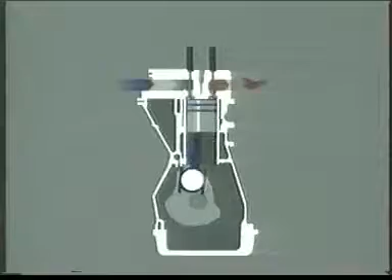Modern turbochargers are based on a simple principle. If the air entering an engine is pressurized and more oxygen forced in, then by adding more fuel, the result is higher engine torque and more power.

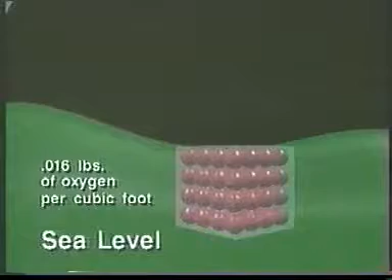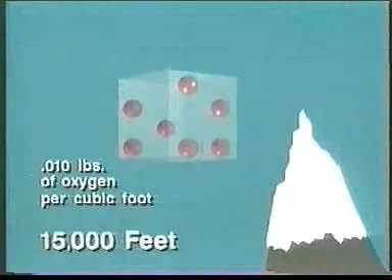At sea level, there are 0.016 pounds of oxygen per cubic foot. At higher altitudes, the air is thinner, so there is less oxygen available. For example, at 5,000 feet, there are 0.013 pounds of oxygen per cubic foot, and at 15,000 feet, only 0.01 pounds per cubic foot. So as altitude increases, it becomes more difficult for an engine to obtain the mass of oxygen it needs to generate its required power.

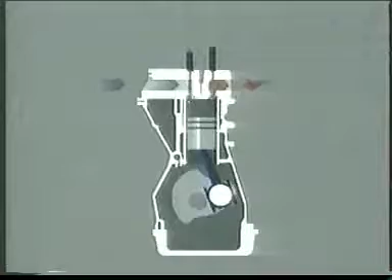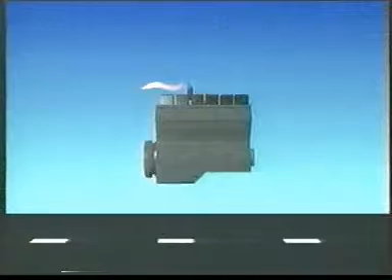In a naturally aspirated engine, the only force pushing air into the engine is the ever-decreasing atmospheric pressure. With less oxygen available for combustion, the fuel is only partially burned, and some escapes out of the exhaust as black smoke. A turbocharger helps supply air by forcing it into the combustion chamber under pressure. It is able to do this since the reduced atmospheric pressure makes the turbine stage more efficient. Thus, the engine can maintain virtually the same air-fuel ratio as at sea level, with almost no change in either power output or exhaust emissions level.

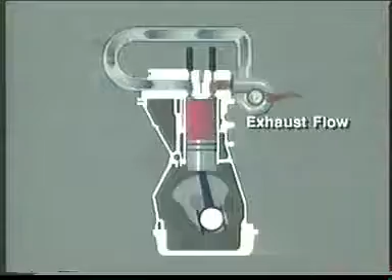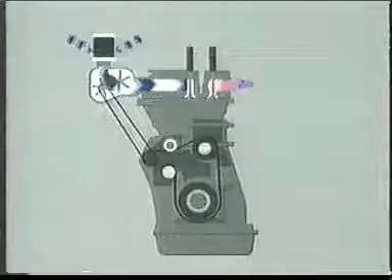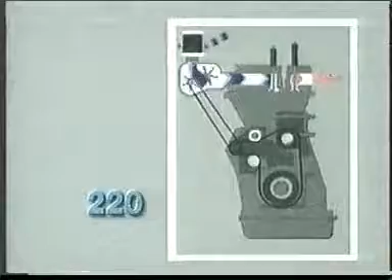Turbocharger technology evolved from mechanically driven superchargers, which create boost pressure using a mechanical pump driven directly from the engine. However, the inefficient supercharger is an engine parasite. It uses a large proportion of the potential power increase to drive itself. For example, a supercharger that could theoretically raise a 220 horsepower engine to 370 horsepower could only manage 320 horsepower. The supercharger itself absorbs 50 horsepower.

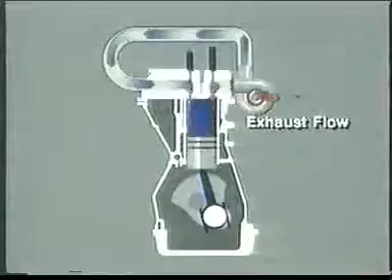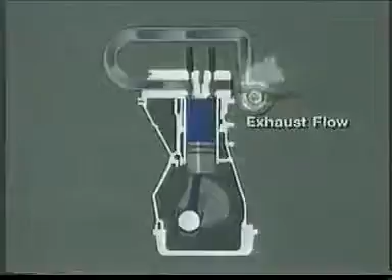Because a turbocharger is able to utilize both the pressure and heat energy of the engine exhaust gases without taking power from the engine, it is far more efficient. It's this benefit that inspired Holset to begin developing turbocharger technology in 1954, and this is also the reason why most diesel-powered trucks have turbochargers today.

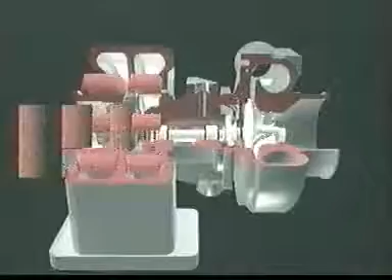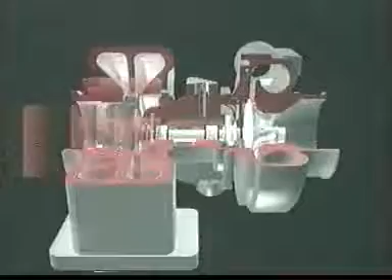Inside a turbocharger, exhaust gas is channeled through the turbine housing, where it increases speed. The gas then flows through the turbine wheel, where it slows down again, releasing energy. The turbine wheel drives the common shaft that connects it to the compressor wheel. The compressor wheel draws filtered air into the compressor housing, raising both its pressure and density, and forces it into the engine.

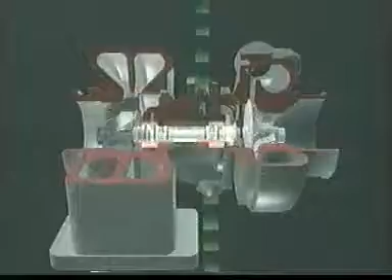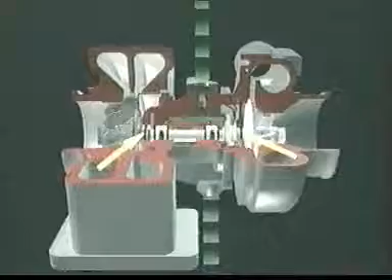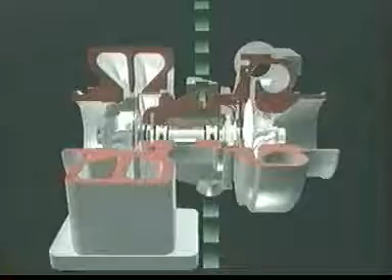The center housing contains precision, fully floating journal bearings. The bearings ride on a film of oil to keep the turbine and compressor wheels turning smoothly at high operating speeds. Also, at both ends of the center housing are oil seal rings, often called split ring seals or piston ring seals. These rings, in conjunction with careful control of the gas pressure differences on either side, help ensure that the oil does not leak into either the compressor or turbine casings. The center housing also contains a thrust bearing, oil slinger, oil baffle, and journal bearing retaining rings.

The rate of airflow into the engine is controlled by the design of both the wheels and housings, and by the speed of the turbo, which automatically responds to changes in engine fueling.

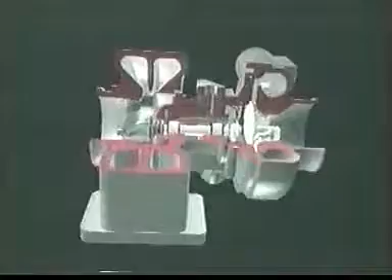It is designed to help you increase your knowledge and skills of turbocharger failure diagnosis. Firstly, let's look at some of the on-vehicle symptoms that are commonly linked to turbochargers, but in many cases can be engine-related. There can be many causes of low power, low boost and black smoke.

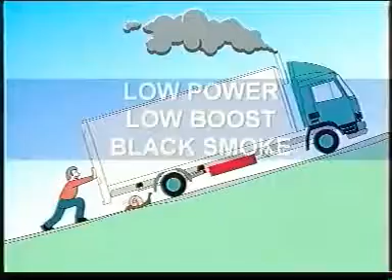The driver won't be happy with any of them, but before taking the major step of removing the turbocharger, there are a number of on-engine checks that could save you time and money.

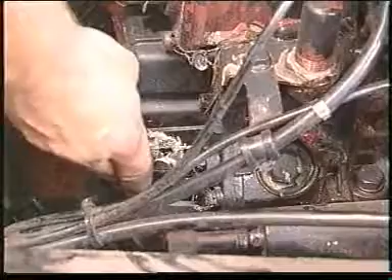Firstly, check the throttle linkage adjustment is correct. Check the injection pump, fuel timing and delivery is correct, and check the injectors. Also check the fuel supply is not restricted. Check the intake or exhaust systems are not restricted, and check that there are no restrictions through the air cooler.

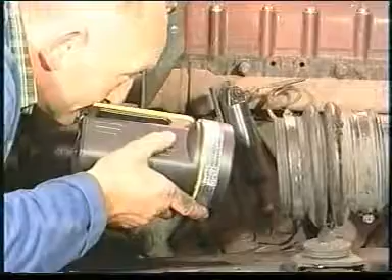If all these are problem-free, then you'll need to check the turbocharger.

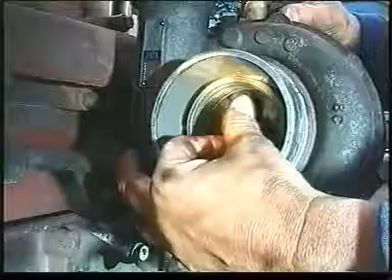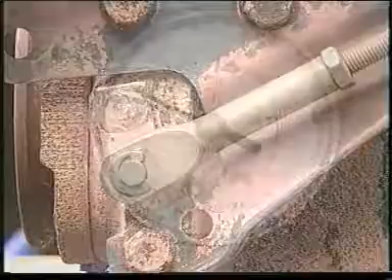Firstly, check that the turbocharger rotor rotates freely. Then check that the axial and radial clearances are to the specifications in the Holset Service Repair Manual. If the turbocharger model has a wastegate, check its operation by applying 3 bar or 45 psi air pressure. If you still have low power, low boost or black smoke, remove the turbocharger for closer inspection.

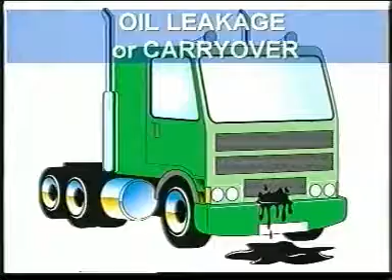If the problem is oil leakage or carryover, again check the turbocharger rotation and clearances. Check for restrictions in the air intake and oil drain.

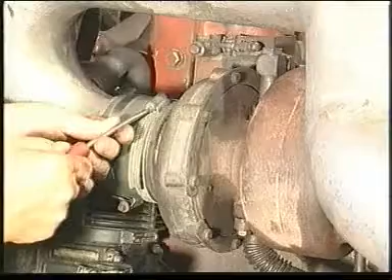If the problem is noise, listen carefully and try to identify how it sounds. If it is a loud cyclic knock or surge, check the compressor intake and outlet for restrictions. If it is a high-pitched screech, scream or howl, check for exhaust gas or compressed air leaks.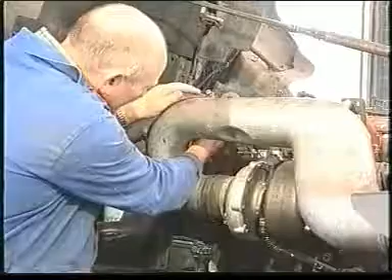Remove the air intake pipework and spin the rotor to check for excessive clearance. Check other areas of the engine to locate the source of the noise. If it is not a leak and the sound is metal-to-metal contact, again the unit should be removed for further evaluation.